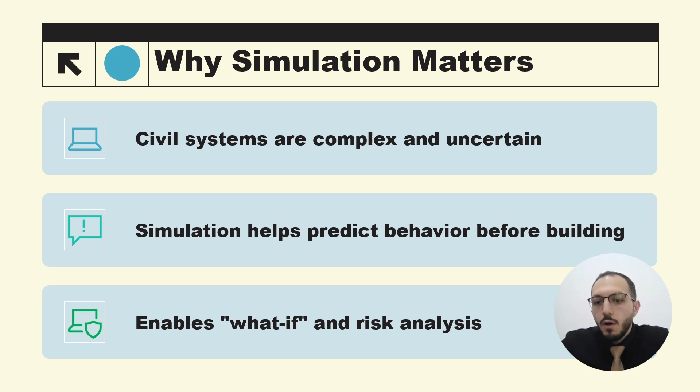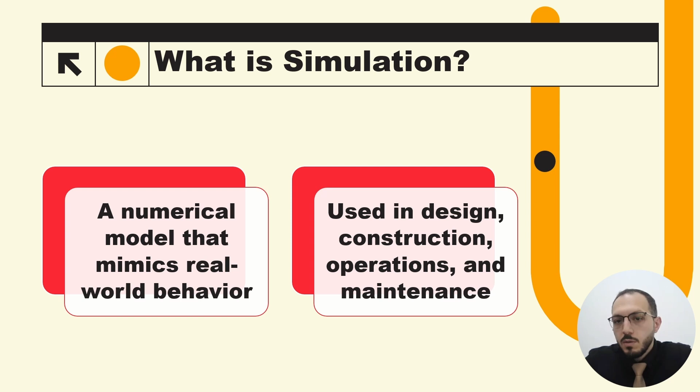At its core, simulation is a numerical model. It's an equation. It's something mathematical that mimics the behavior of real-life systems. It can be used during design, construction, operations, or even maintenance, right? All these options we can try with. For example, we might simulate a bridge's collapse under extreme loads or predict traffic delays during an evacuation.

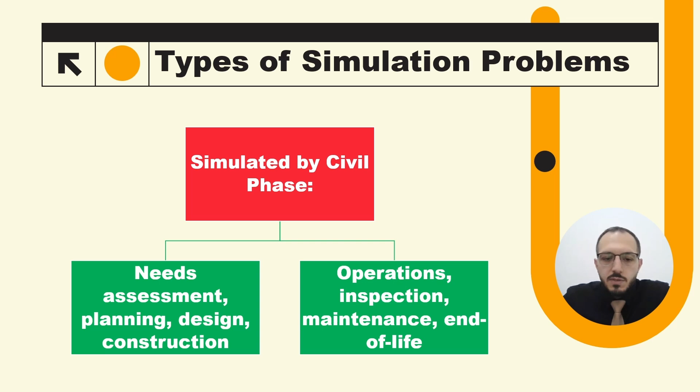We can simulate different phases of a system's life cycle. In planning, we simulate needs and demand. In design, we model structural behavior. During construction, we simulate resource allocation. Like, where do I get my concrete? How much do I need? How much do I have? When do I need it? That's also important. And in operations or maintenance, we model deterioration or failure. Simulation is flexible. It applies from concept to end of life.

Let's look at real-world examples of simulation. For example, simulating stress and collapse in structures, and that's what you do in Robot and Revit and all these tools, right? Modeling traffic flow and emergency evacuations is another thing that you utilize. Predicting flood levels when we're designing dams, or simulating HVAC airflow in large buildings, which you learn in AE 414, I think. Planning earth-moving operations, crane operations, dam releases, which we do in construction processes and construction equipment. Simulation helps answer questions we cannot afford to get wrong in reality.

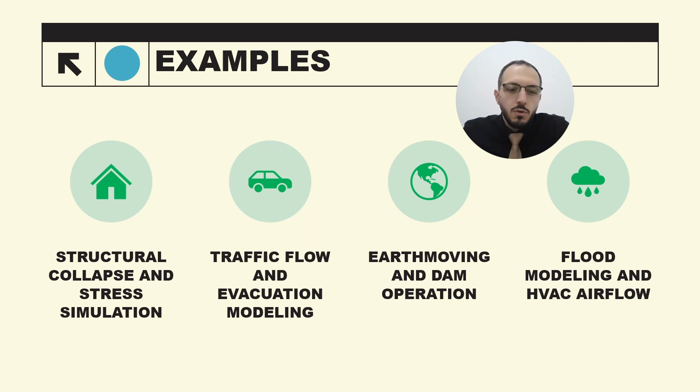Simulation uses two types of numerical models: deterministic models, which are equation-based, same input, same output, and stochastic models, which include some sense of randomness. They reflect the real world more than the deterministic models. In civil engineering, we have to combine both. For example, we use the equation of randomness to predict the weather and the impact of the weather, but generally, the yield strength of steel is known, around 420 megapascals, give or take, based on impurities and so on. So generally, things like that are deterministic.

The yield strength of steel should be within a specific range. If there is something that is unusually affecting it to be in a different direction, then in that case, for example, the factory could be faulty, or something should be done to make sure that it's either corrected or never used again.

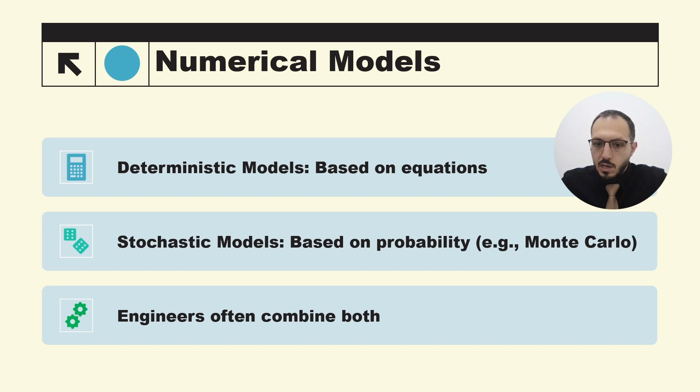So why bring in randomness? Because civil systems are not predictable. There is always something affecting it. So we can't always be sure that this is what's happening or this is what will happen. Materials have strength ranges, traffic fluctuates, costs escalate, weather changes. It's never predictable. One day it's clear in the morning, the second you have a sandstorm. Random numbers let us simulate these uncertainties and estimate the likelihood of different outcomes.

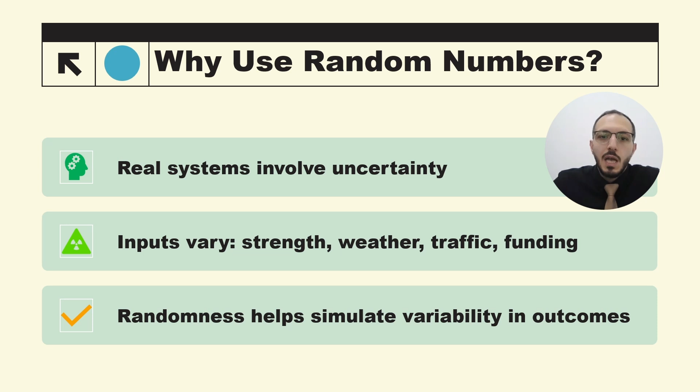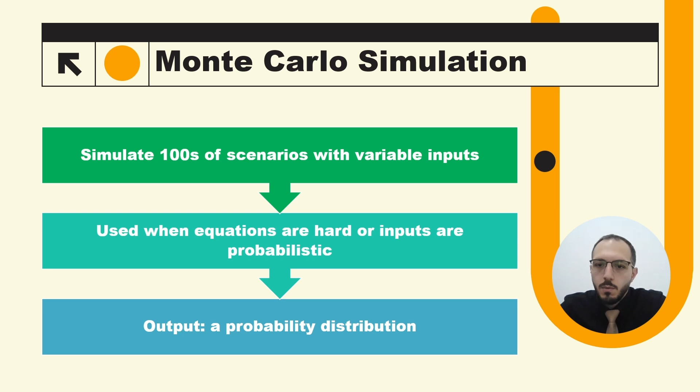One of the most powerful tools in stochastic modeling is the Monte Carlo simulation. It runs hundreds or thousands of scenarios, each with randomly sampled inputs. This builds a distribution of outcomes instead of one single answer. We use it when equations are too complex or inputs are too uncertain, and we have a seriously wide variety. So instead of doing an infinite number of trials to figure out what is the most likely, we do a Monte Carlo simulation enough times for it to converge to the most probable outcome, like predicting costs or failure probabilities.

So let's look at a simple example. Suppose we run 5 cost simulations and 2 of them exceed our $1.15 million budget. That suggests a 40% risk of running over budget. But 5 runs are not enough. So we repeat the simulation 100 times or even 1,000 and 10,000 times. The more we repeat it, the more certain of the most probable outcome we become. The more we sample, the more reliable our estimation becomes.

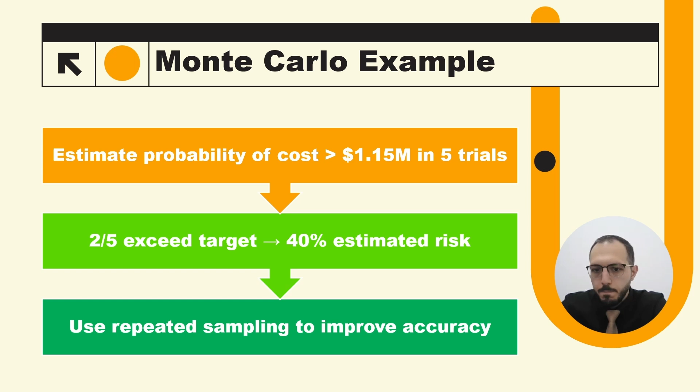So what did we learn? Simulation helps us engineers test ideas and manage uncertainty in a pseudo environment. It mimics real systems using deterministic or stochastic models, or usually both. Random inputs reflect how civil systems behave in the real world. They're always unpredictable. And one of the main tools we use is Monte Carlo simulation, where we create certain equations and designs, and then we iterate them many times until we get a convergence. And it's a key tool for risk-based design and decision-making for engineers.

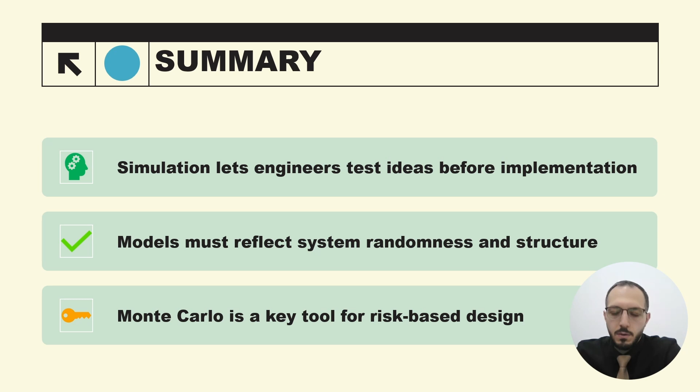And that's the gist of simulation. Are there more tools and more approaches? Of course. But this is a good foundation for now before you get into more advanced courses about these topics.